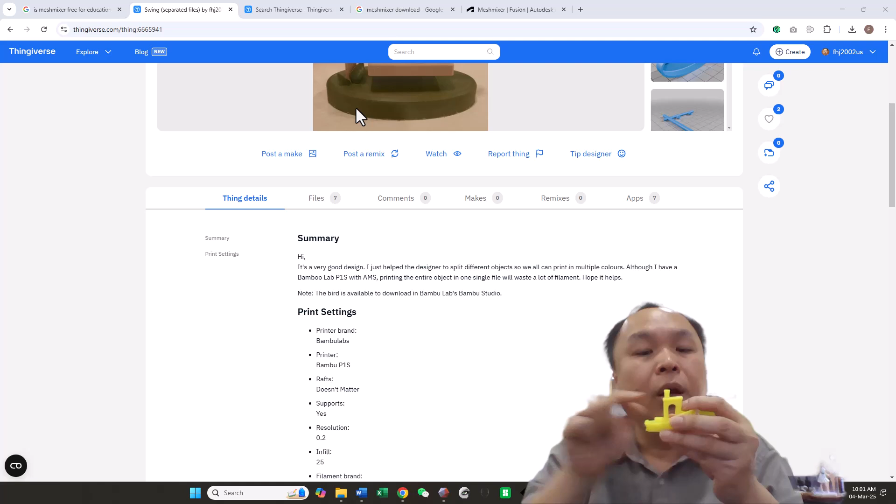So, for example, in here, this is a famous object called Benchy. If you look at it, the center, if they are full of support in the center, is very difficult to remove. So to print this object, we have to print without the support. So without the support, you have to configure your printer properly. And of course, if you want to have a car, you know that the roof is very wide, very long, and without support, it's quite impossible to print it out because when these are the floating object, and there's nothing supporting it, the plastic will move down. So it's not straight, and then the roof of your car will not be perfect. Even if it's okay from the top, if you look at it from the inside, it will look terrible.

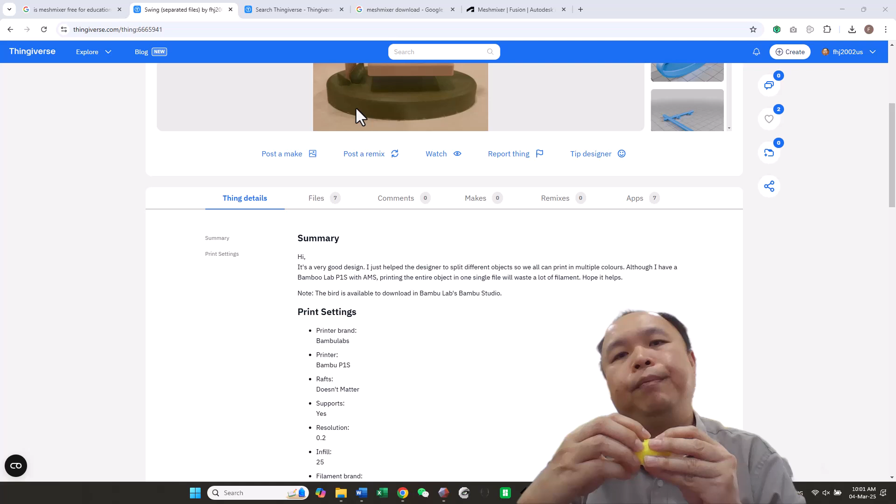Okay, so how are we going to fix all those things? We are going to break the object into parts, and then we're going to print it out one by one. So for example, this one, if you print the whole object out in one print, you will notice that there will be a lot of support to support the wooden part area here. A lot of support here, and it will not be beautiful. So the solution is to break it down into smaller different parts like this on the right hand side. Break it down into different parts, then you can print it out and assemble it back together. Okay, this solved a lot of questions.

I think a few students actually came to me asking me how to print out a big object, how to print a big car. This is one of the ways, but not all the designs can be broken down into parts. It depends on the original designer. If the original designer actually did a scan, a 3D scan, it may not have different parts. If they're created with a CAD, computer aided design software, then it's very likely that they can be separated. Only those that can be separated can be printed out perfectly.

Okay, what am I going to give you in the next few lessons? You may spend 3 to 4 lessons to complete a big project. So today you are going to learn a new software. You will be given something like this. This is a flexible LED. You know LED has light. So LED has light. You can bend this LED.

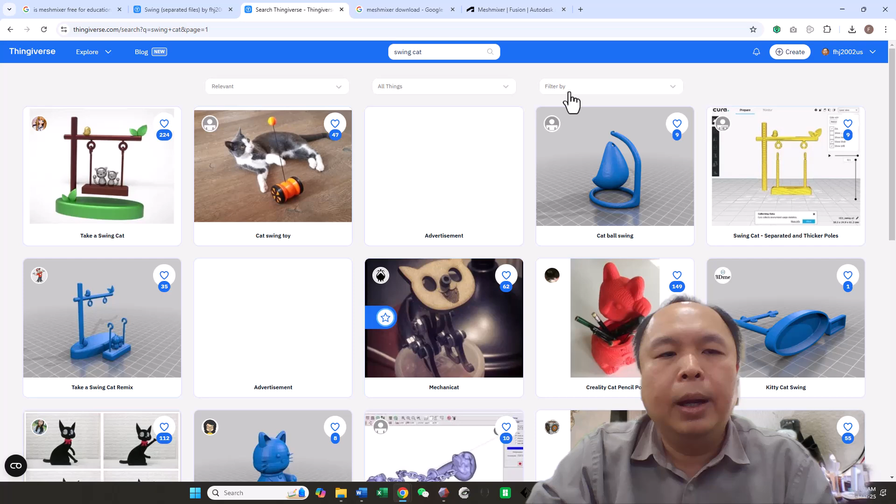So we are going to go to Thingiverse. I think you already know what Thingiverse is. Okay, Thingiverse.com. In Thingiverse.com, try to look for something called SwingCat. We are going to use SwingCat as an example. Okay, look at this one. This is the example I'm going to use. And if you go to remix in here, you will see I have also uploaded one version. And this is also something that I have printed out. Okay, you can see.

If I ask you a question, after you have done this 3D modeling for around 15 lessons, you should know that when you set this to print, you cannot get such a perfect print. You will notice that they have a lot of, okay. Although you can see, because this one is using an older printer before, I would say before we properly configured it. Okay.

So this one is not so perfect. If we print it now with our new 0.25 print head, it will be very beautiful. Okay, very beautiful. Obviously, we haven't optimized the printing. So in this case, you can't really print everything out in one time.

So what you need to do is you have to break the bird out, the leaves out, these wooden parts, all these parts you can see from here. We have to break it down so that we print all these parts separately. Okay, we have to print this part separately. Then we combine them together, glue them together.

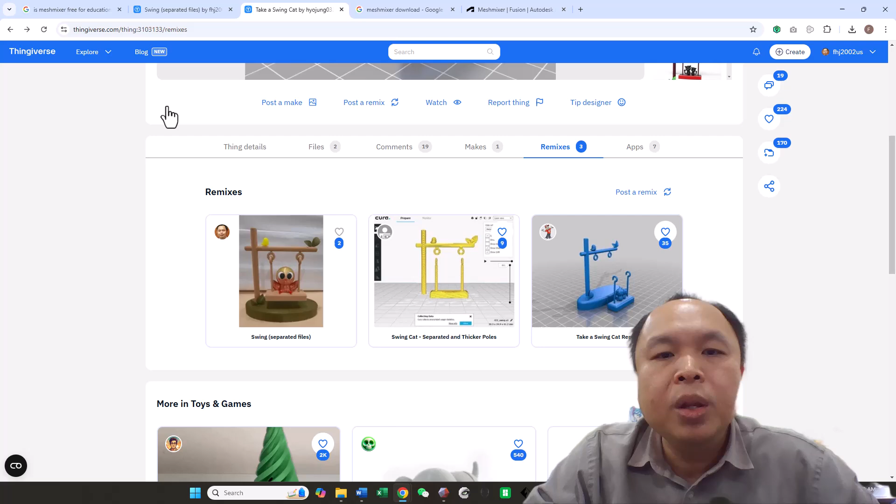For example, here this area you have to glue them together, because the original designer didn't really put in an area for us to slot the leaves in. If you look at the files, I have already separated them. Let's have a look at the original designer. The original designer actually gave something like this in one piece. So very difficult, which is quite impossible to print.

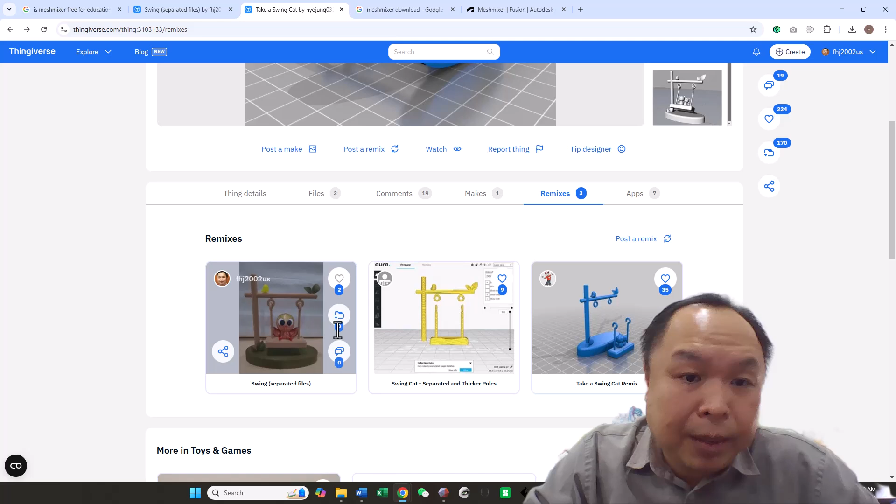So actually, what I did is I changed the cat to one bird. So it's slightly different because I like this bird very much, very cute, and it's printed out using our 3D color printer, Bambu Lab P1S.

Well, how to do this? First, you need to download your file. For example, click here. Okay, downloaded. Then you have to unzip the file. I think I will go for files. There's only one file. I'll just copy it out and then Control V. Okay, this is the STL file.

Now what you need to do is we go to Meshmixer. You go to File, Open File, and you look for the newly downloaded file. Is it here? Let me check. Okay, sorry. Import. So you can see this is how the file looks. You can't print it out in one shot.

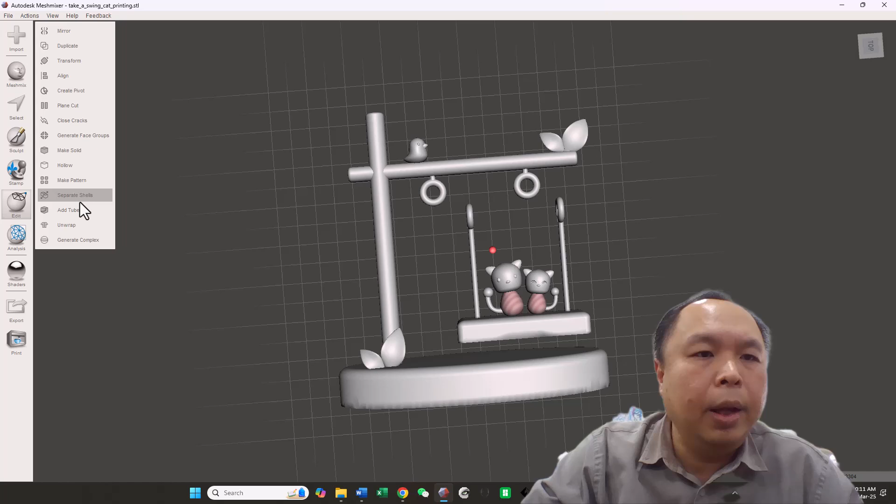So what you need to do is, let's look at Edit. In Edit, you can choose Separate Shells. Once you click Separate Shells, you click here, this is the bottom, click here, this is this part, click here, this is this part. You can combine more than one part. For example, this part plus this part, holding down the Control key, means these two parts will be combined when you export.

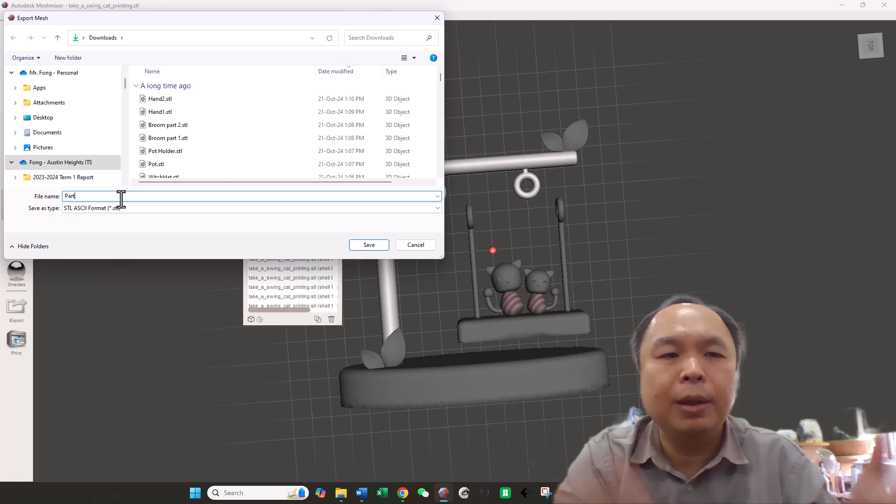Go to File, you can export, just export in STL. Give it a name, maybe part one or something. Give a proper name. Part one, save it. So it will export this portion out. Then this one also needs to be exported separately, the leaf section. So you see all these parts can be separated. Then you have to export one by one.

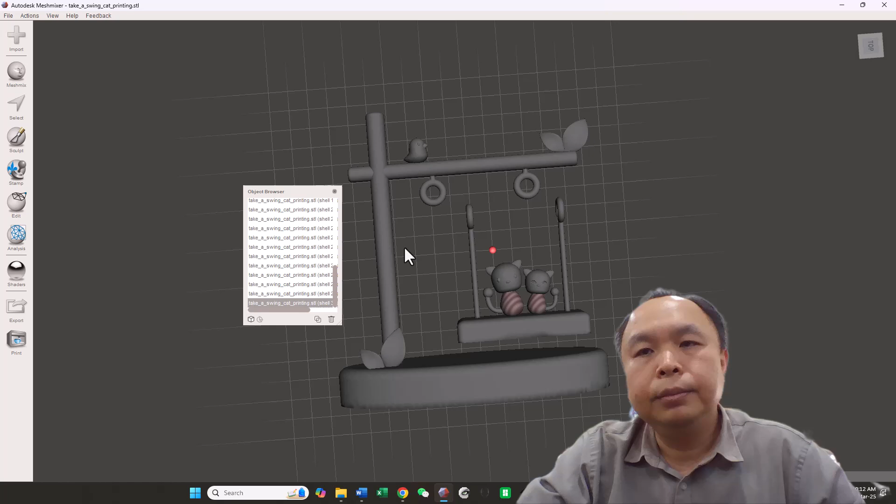You can imagine, so complicated, in order to print out nicely. It's not easy. So those parts that you think can combine together, you combine together and print. For example, this bird, you have to combine all the parts that belong to the bird and export in one object. Okay, so other than this one, let's go to Select and let's select this.

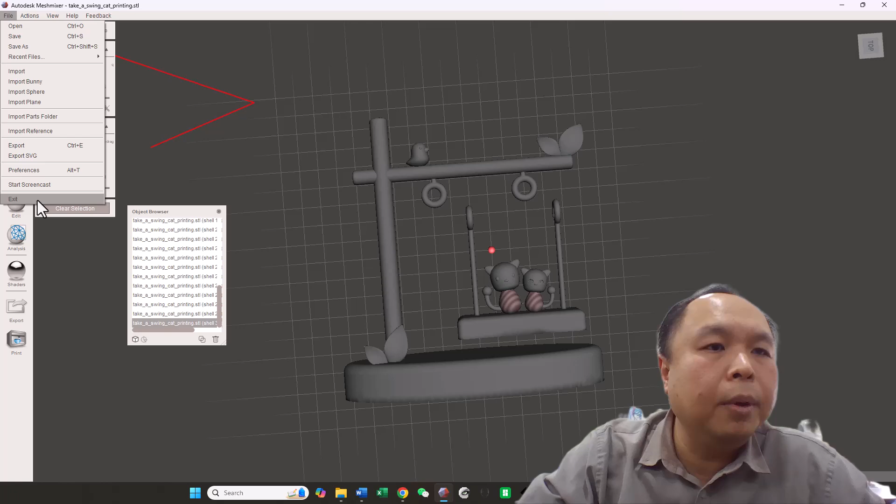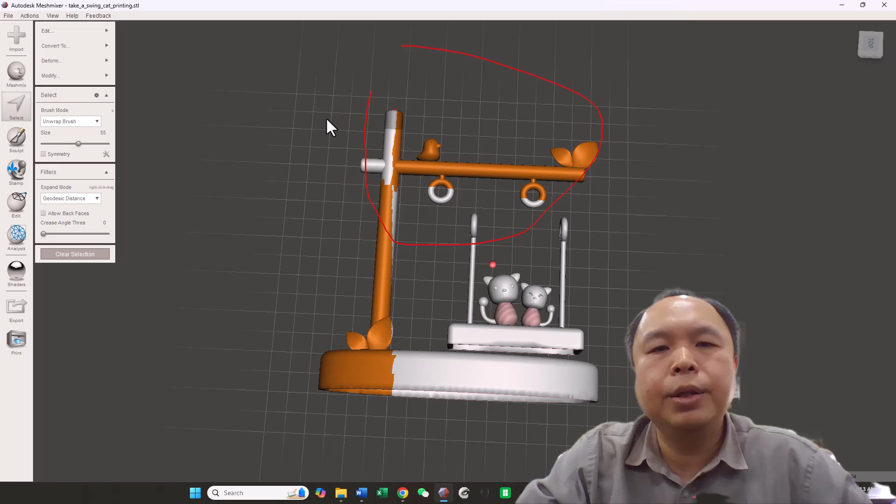Okay. Let me, oops. Okay, that doesn't matter. We open Meshmixer one more time. Import. Let me see here. So if I come to Select this time, oh, no choice. I have to select in such a way. You need to touch the object. So if you want to select a certain object, you have to select. Just do like this, easier.

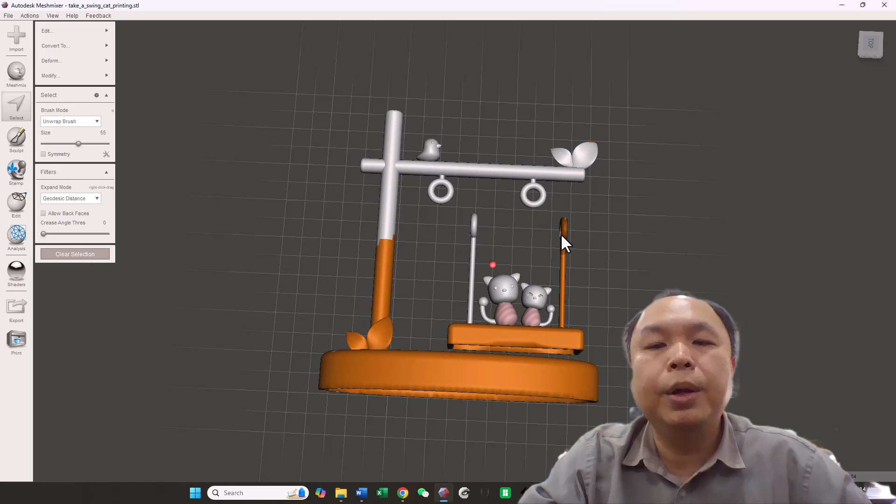Let's select the whole thing. Don't care, just select the whole thing. So when you're selecting, you see the red dot. You must color it with the red color dot, so you can select. Let's say we select the whole thing. Take your time, select everything.

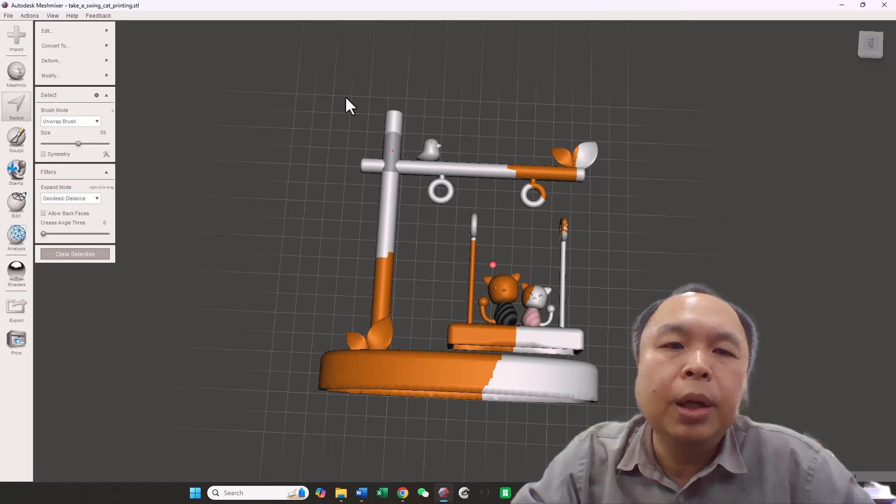What I am going to show you is what if this object is too big? What I mean is, this object is too big. Okay, made a mistake already. You're supposed to have a select.

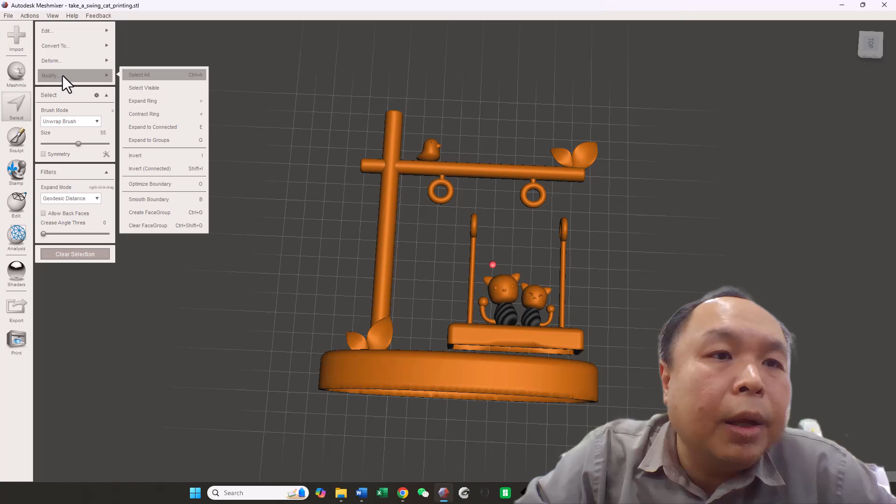Okay, select all button. Okay, there's a select all. After you select all, you go to edit. There is one function called reduce. Okay, you reduce. Yes, I didn't use this software for a long time. Instead of percentage, you can say max deviation. Okay, max deviation. One of the reasons I like to go here is because it depends on your...

This is how many you want to print. So you can set to 0. Of course, 0.01 is the lowest if you use a resin printer. For us, I think 0.2 will be enough. 0.18, 0.2 will be good enough. Okay, you can type in also. Percentage, they will reduce by 50%. Okay, so what I do now is I click accept.

Then let's see whether it will help or not. Export. Export. I think, oh, sorry, wrong page. Okay.

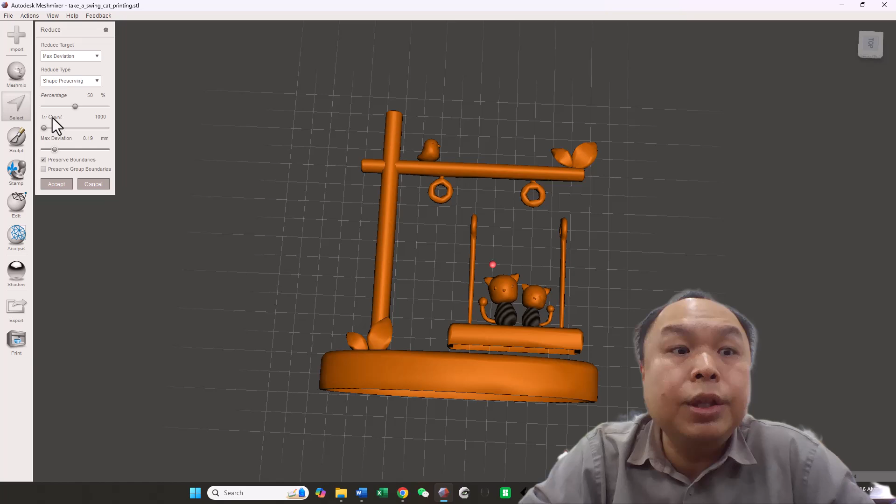Okay, because we are too greedy, I think, because of this 0.2. Okay, if you do not put 0.2, you put higher, and then the percentage you can put, this is tri count. Okay, you can put lower, and the size will become lower. Okay, this one you can play around. This is how you can reduce the size of the object. Okay, by controlling here. Of course, it depends on the quality you want.

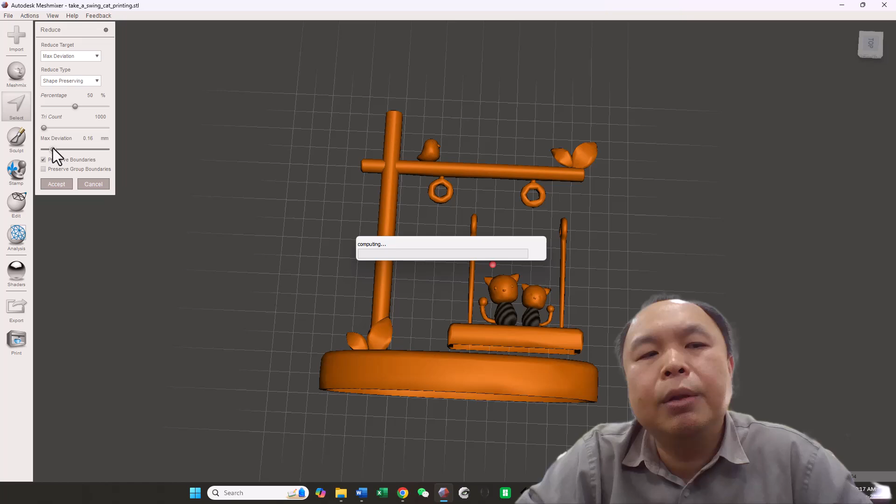It depends on quality. You can create parts by parts. As I mentioned, you can actually export the parts one by one. After that, when you redo it, you can set to higher quality if you want to. If not, you can just make it smaller, and then set the max deviation higher. Maybe you set it somewhere around 0.5. Definitely the size will be low. Okay, let's try a little bit. Can I reduce this one?

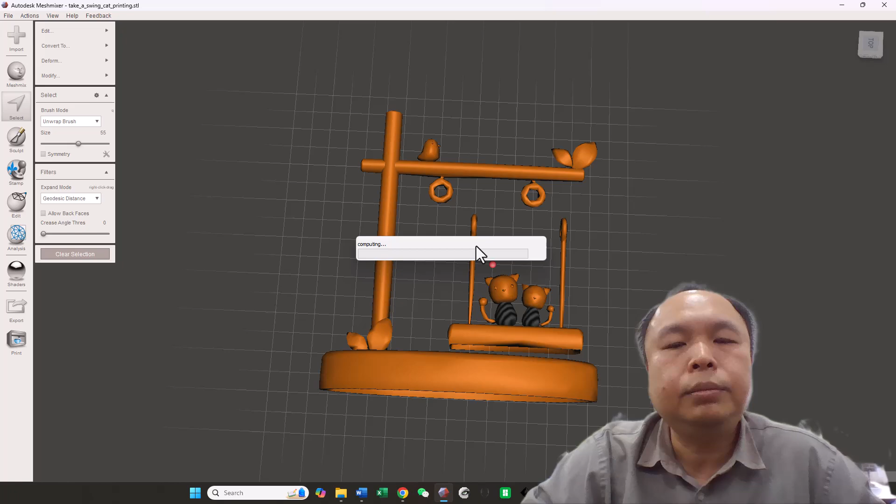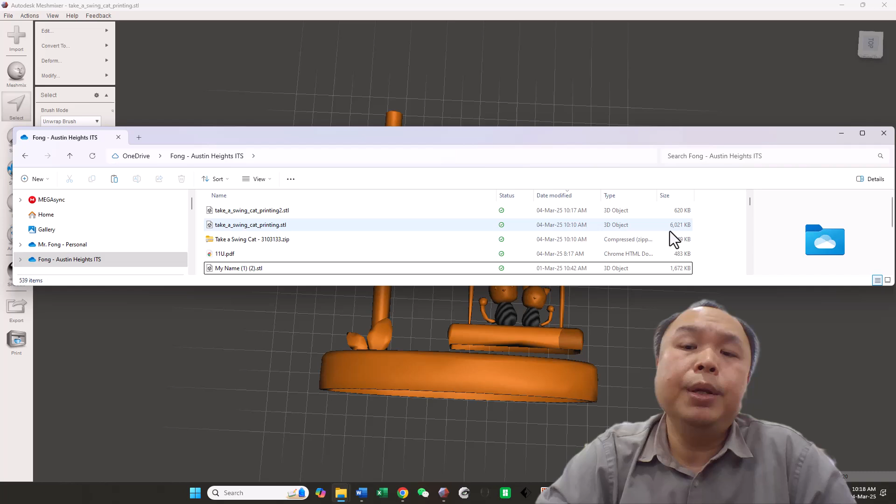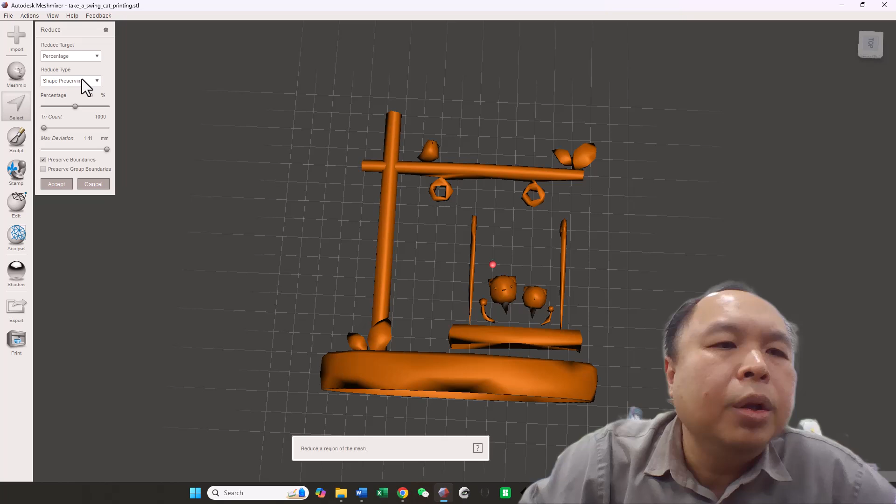Okay. So if you look now, this is the original size. Original size is 6,000 KB, more than 6 MB. This is only about one tenth of it. So you can see, if you increase this setting, the quality changes. So you go to edit, reduce, change this to max deviation, and here will help you to control the size.

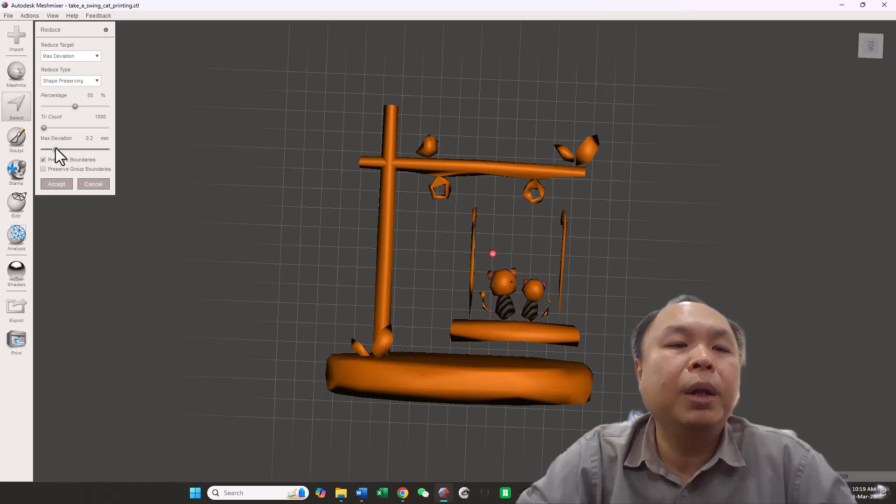Okay, the bigger it is, of course the quality is worse. So do not set it that high. This really depends on how good you want the quality to be. Reduce the quality, you will get a smaller size. Definitely 1.11 is really too much. You don't have any details there, so do not reduce that much. So you can control, but do not go too high, or you lose all the details. So again, you use file export to export whatever parts you want. This is provided the object you download is working.

So during the lesson, you will have to go to this Thingiverse, and try to explore what you want to develop. Okay, the target, the topic is diorama. That means you can create something like a car park, a car parking area. You can create a room, maybe a storeroom with some cargo inside. You can just create three or four items. For example, a table, a sitting table, and a few drums, those alcohol drums, put in the center.

Then you can create some neon lights just at the back of your design. And what else? You think about it. We can discuss this during the lesson. I want you to think. I don't want to give you too many ideas. You can create gardens. You can create a house. You can create rooms. Up to you.